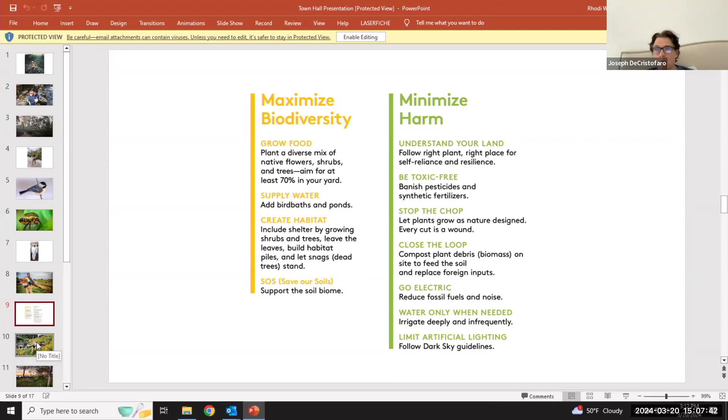100%. So we have a new book that we just produced that's a sort of update, more of a primer. And we are getting it translated. I think the translation just came in yesterday. So we're going to be printing that — about 1,000 copies in Spanish, and then another 2,000 in English as well. So they'll be available really soon.

That'd be wonderful. Especially, is there anything you could give us here at Village Hall, pamphlets or something that we can hand out? Absolutely. Yeah, I'll make sure that Tim can — I live in the Hudson Valley. Okay, so Tim will be your point person there for sure. Absolutely, thank you. That way we can get you connected with the homeowners. That sounds great, I appreciate that. Yeah, thank you. Thank you.

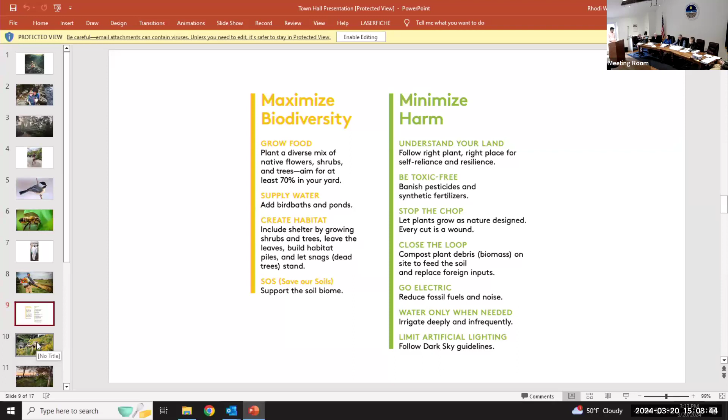Any more questions? I just wanted to compliment you guys. I totally appreciate it — Sag Village a couple years back actually did put in some restrictions on the blowers. I'm probably the only person on my block that isn't blowing their entire lawn every cutting. And you're right, it is amazing to me how much time is spent using the blower. I never use one, but I would agree with you, it has to hurt your body. Yeah, I think he should probably be wearing a mask too for all the particles.

I know, people need to mow it, get their lawn clear, they want to do it quickly. Totally understand, we're not saying get rid of them and throw them out or anything like that. But let's try to figure out how to bring everyone into the fold and make sure that people can do their work and do it well. Okay, thank you. Thank you so much. Thank you.

We have a site plan application of Samudra Farms LLC, 7 Fairfield Pond Lane.

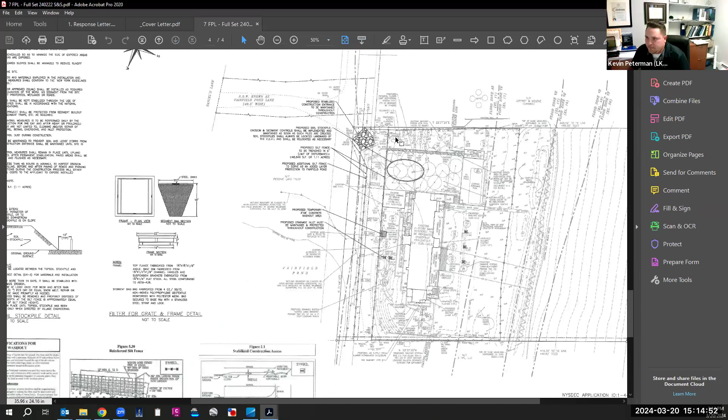Okay, so now we're seeing in this area up here the new location of the construction access, which I think is probably the most suitable location to make sure that all of the construction equipment is tracking over this thing. It's something that's traversable by a normal car, something anyone can drive over.

As part of this construction, we just want to make sure that the neighbor to the south, his access is not impinged, that it's not affected during construction. Those are some of the things we recommended in our most recent email when we said we looked at the plans, the applicant resubmitted, and he addressed all of our previous comments.

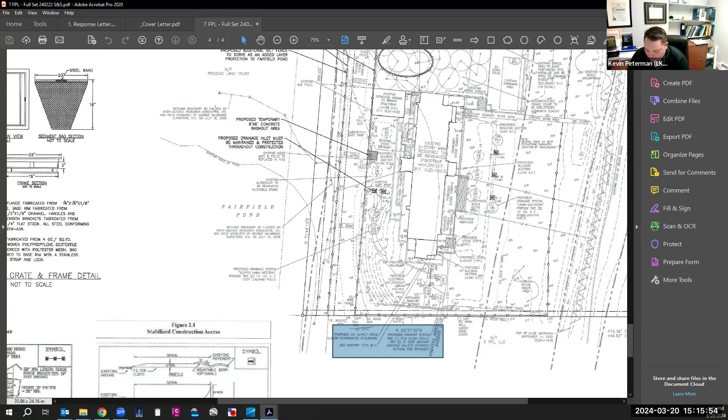Assuming the applicant has addressed all outstanding concerns of the board, we would recommend approval with two conditions. Number one, access to the private right-of-way must be kept clear at all times so as to not disrupt access to the adjacent residences. Number two, the applicant be responsible to repair any damages to the private right-of-way incurred as a result of the subject application.

We also have a coastal erosion hazard boundary that bisects this property, and the applicant is proposing to disturb lands seaward of that boundary. They're also proposing to add fill. We want to remind the board and advise the applicant that all land disturbance activities seaward of that coastal erosion hazard area boundary do require a coastal erosion hazard permit from the village.

Additionally, the applicant should be advised that an importation permit may be required from the village building inspector for the net import of 310 cubic yards, of which approximately 165 cubic yards of fill will be placed inside the coastal erosion hazard boundary. That's pretty much it. I think the applicant did a nice job addressing all of our comments to date.

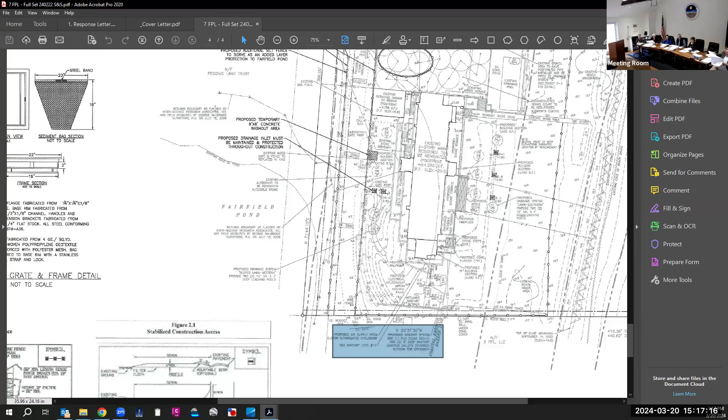Kevin, just for the purposes of the record and confirmation for the resolution, on the version you're referencing that's on the screen, the last revised date is February 22nd, 2024? That is correct. That's the version the board has, and it shows how efficient the village of Sagaponack is that February 22nd is a very recent revision. I confirmed with the applicant's attorney that this is the version the board feels like approving today, and this is the version that'll control.

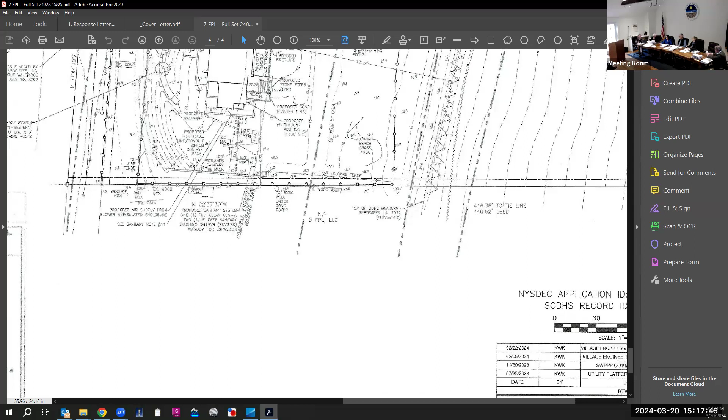Question, go ahead. The dark black lines are the proposed limit of clearing, grading, and ground disturbance. It seems like a lot of land there to clear and grade, and it's right behind the top of the dune. What are they clearing?

You're talking about the limits of disturbance on the south side of the house? Yes. Inside of this line, I think we're proposing to do some restoration work on the dune, which, as your engineer has said, will require a coastal erosion permit from the building inspector in that area. We had submitted with this application a copy of the landscape plan proposed to kind of restore that area.

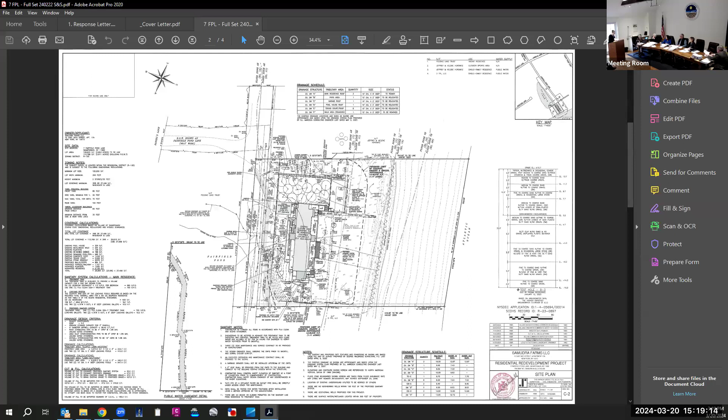And how are you restoring it? I think right now there's actually some lawn in that area that's being removed and replaced with native vegetation. We had submitted a plan prepared by Margaret. Are you digging out basically? No, the restoration will require the addition of fill, which Kevin can mention—that portion of the fill proposed in this property is actually for that area south of the coastal erosion hazard line.

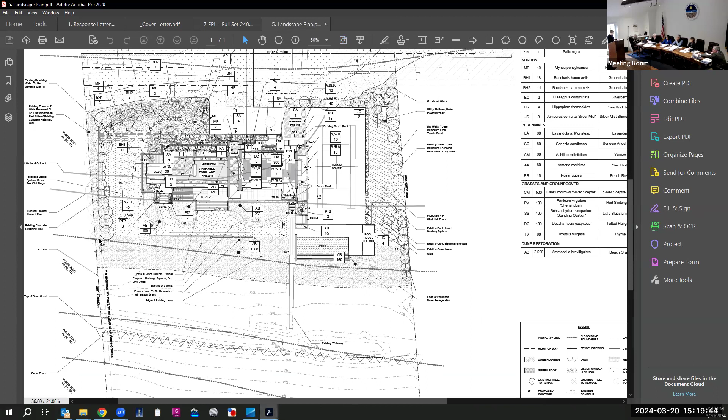But it says clearing and grading and ground disturbance. It'll require ground disturbance because we're removing existing lawn. It is shown on Margaret's plan, which gives you an idea of where the existing lawn is south of the pool area. It'll retreat in line with the edge of the pool, and then there'll be native vegetation to the south where the pool is right now.

So what you're saying is you're taking out a lawn and putting in native vegetation on the south side of the pool. Correct. But you need to recognize that you can't take out the lawn without a permit. Correct, which we would obtain a coastal erosion permit from the building department for that work. So it's more a matter of them trying to go backwards instead of forwards, taking out what somebody did.

Behind that dune is very sensitive. Are you redoing the dune as well? I believe there is some restoration work required in that area as well, because it is lawn at this point. Thank you, any other questions?

Oh, right here, yeah, there we go. I wonder if it's irrigated?

What were the rings underneath the tennis court for? Wasn't that part of that system? It wasn't—they're being relocated outside, it's still picking up drainage from the tennis court. Where are they being relocated to? To the east, right up there. They look a lot smaller. Those large circles are just a setback—the actual geothermal probe is just that little dot in the middle of those large circles. The smaller circles are the 8-foot diameter dry wells for the tennis court drainage that are already in place, they're just being relocated. The tennis court is being pitched away from the house towards a gravel trench with a perforated pipe that would then be collected by the dry wells.

What Kevin has highlighted, that little dot, is the actual geothermal probe. So it went from 12 to 8. There were no geothermal wells on the site before. No, I mean, you said you were moving something. The original drainage for the tennis court was located underneath the tennis court. That drainage system is now being relocated to the east of those 8-foot diameter circles—from 12 to 8. But that has nothing to do with the geothermal.

Maybe I can try to help clarify. These round circles you see with the dotted lines inside the tennis court show the offset, the required offset between each of the wells. Each of the wells is actually very tiny, right in the middle of these dotted circles. So what we're seeing inside the tennis court is, at the center of these offset circles, the actual well location, and then the offset circles themselves—these are kind of just fictitious, there's nothing actually there. It's just showing where the applicant can install the wells in accordance with the manufacturer recommended offset distances.

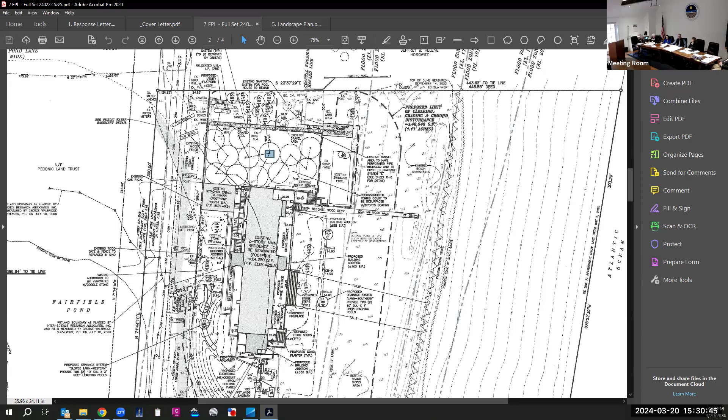12 wells going to 8 wells? There are no wells under existing conditions, to the best of my knowledge. The number of dry wells that existed in the existing tennis court will remain the same number, same size, and they'll just be relocated a bit further east. Thank you. Sure.

Guess I don't. Any other comments? Do you want to move the resolution, Bill? I'm not sure we've satisfied, I don't know if questions... we have it. This is not this circle, no, I understand that. That's where they're going to be drilled right there. Drill right in that spot.

So Lee, you kind of started some of this. Is there some problem you're trying to address? I'm just trying to figure out where we're going with this. I think it's a matter of information for the village to have. I wouldn't consider it an impediment given that an awful lot has been reviewed and found approvable. But I think we're going to see more of what would be considered the new and best. It's an issue of what's below us. We don't know an awful lot about what we're perforating, and that's a concern of mine.

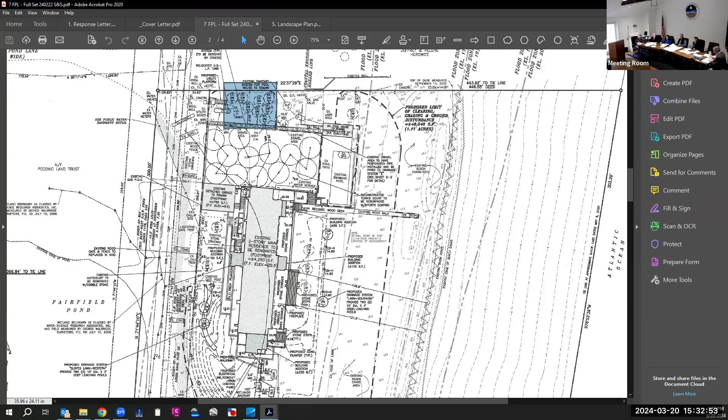Let's see, Kevin, I think you're done. He's not coming up again. You're done. Thank you, Kevin. Thank you very much. You're very welcome, everyone. See you soon. Okay, take care.

Next item is the Wolfer Trust subdivision performance bond. It's been, I guess, 2 years since the subdivision was finished. They put up the bond in cash. They don't really want to develop the subdivision, but they'd like to keep it all in place. So they're asking us to continue to leave the bond money with us, and they'd like us to extend the approval on the subdivision bond.

For additional 2 years, correct, Mayor? Any questions about that? I mean, I guess it's a good thing that they haven't, the land is still undeveloped. Okay, I'll make a motion to approve that, the extension of the performance bond. Second. All in favor? Aye.

Minutes from last meeting. Anybody find a problem? I thought they looked pretty good. I thought they were good. No problems? No, I wasn't here. Right, okay, no spelling errors. Oh, don't ask me for that. Okay, I'll make a motion to approve the previous minutes from the monthly board meetings. Second. All in favor? Aye.

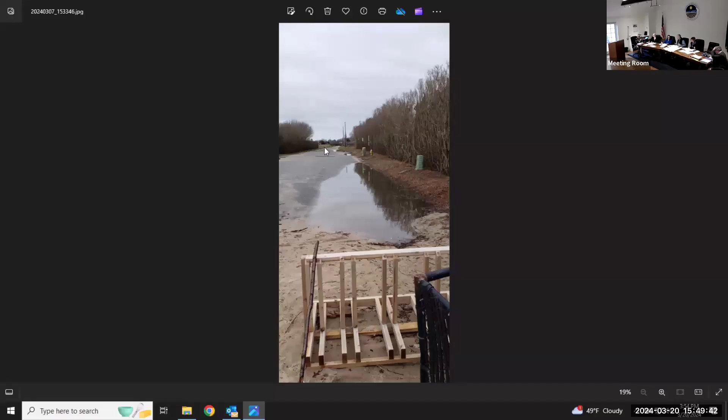They did a survey of buried utilities, so that would be the limit of how much we could push out. Is that where all the red marks were that I saw this morning? Oh, yeah, I didn't see that. Yeah, they must have marked it up in the last week or so. But the marks are there, so they must be looking for what's under there. Before he could definitively say what we could push out, he had to find out where everything was buried. So now that Jim has that information, I think he's going to present us with some ideas. Actually, he gave us numbers too.

The picture you have up right now, from the bottom on the right-hand side where the puddle is, going northerly to a little bit further, we're going to be putting a French drain on that whole section. It's going to be 2 foot wide, 3 foot deep, filled with gravel, larger gravel on the bottom, lined by filter fabric on each side of the trench. On top of the bigger gravel, we'll put the driveway pea gravel you see in most of the driveways, so it blends in.

A lot of times, especially on this project in the past, French drains were covered with filter fabric and topsoil and seeded, so that 6 inch layer of topsoil got silted up and is kind of preventing this water from going down. There were some small sections of an existing French drain in there. We're going to put the French drain down the whole line, this whole easterly edge of the parking area.

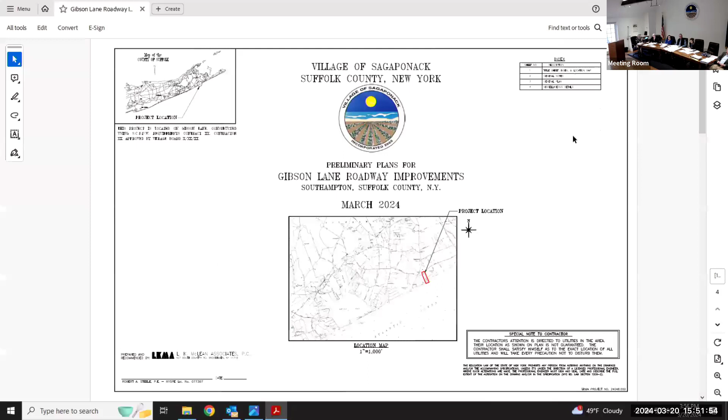Jim, I'm going to pull up the specs that you sent over. Can you park on that French drain? Yeah, it'd be gravel, your front tires will be on it. My question was the same thing — can you park on it? Yeah, yeah. You want to bring up the plans? They're not in our book, right? No. Okay. So basically, visually, it would look the same in relation to the parking area.

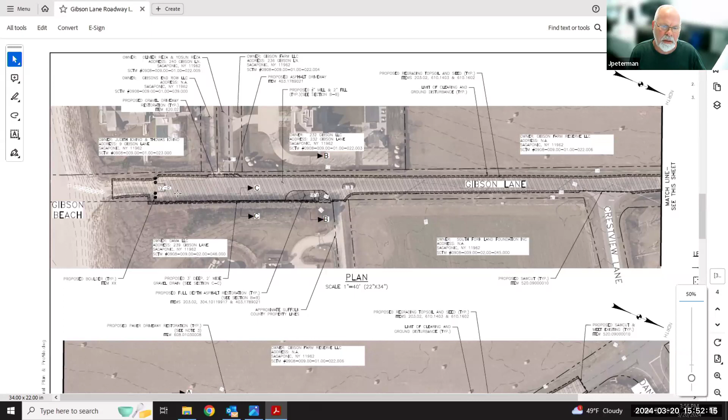Well, if you look at the plan, right where Rhodey has the mouse there now, there's an area left that we could probably gain another 6 or 7 stalls. Right where you've got your mouse. Oh, the bump. Yeah, there's a high area where the dirt and grass is probably 18 to 20 inches higher than the road, and I believe they left it that high because there's a lot of utilities running right there.

As somebody mentioned before, there's a lot of paint out there. The red paint is electric, the orange is telephone, the yellow is gas, and the blue, of course, is water.

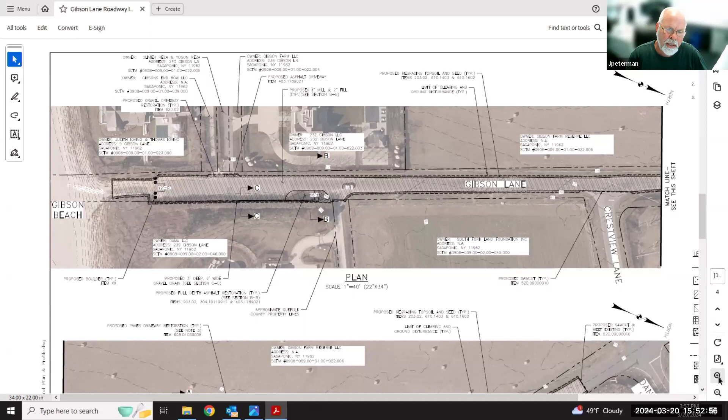Now that we know where everything is, I have two lines - an electric line and a telephone line that are probably 4 feet off the pavement in the area where we want to rip out that mound of soil, put in sub base, and asphalt it. We're going to do a test hole when it's time to find out exactly where these are. They may not be deep because they're not big service lines, just servicing a few houses. So if they're not deep enough, I can get the utility to drop them - excavate underneath and drop the conduits.

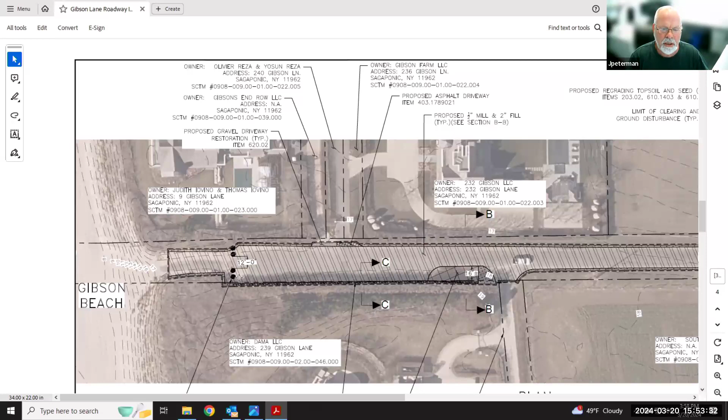Where's the French drain going? You can see it, it's on the south, well the bottom side of the road here, which would be the east side. That whole length, yeah, I think we had 50 feet before. It lasted 7 years. It could not be much more than 7, maybe 10 years. We've done the French drain previously there, and you can't actually see it.

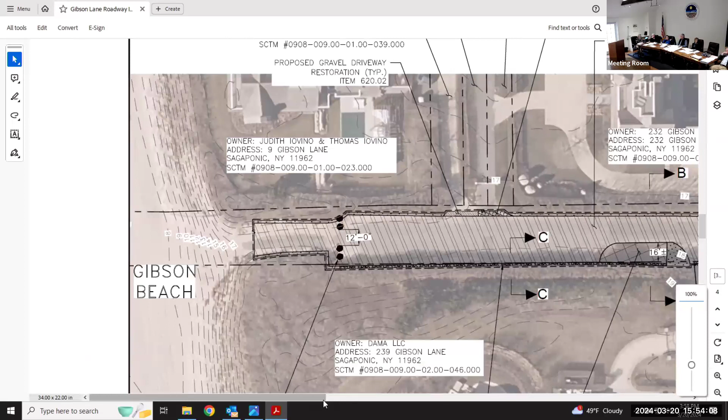Can't you just regrade it and forget the French drain? But you have water problems there because the property comes down on the east side and the west side.

Do they have something called hedges that are raised? What about a drainage wick, where you have a couple spots, dig holes and then... I mean, basically the French drain is an excavation 2 feet wide, 3 feet deep that you fill with gravel. You're not going to really notice anything except the gravel placed on top.

Right now, the surrounding properties and the road ending are higher than the road, so the water has nowhere to drain off to. All the surrounding properties, to verify what he said, have berms that the hedges are on. So they've created these hills that create the continual puddle that comes to the east side.

What about something called a drainage wick? You dig the hole - a wick is typically put through an area where you have a clay layer. That's typically called a wick, where you have a leaching basin and then you dig. Or if you have a recharge basin that's not draining, you put a very deep, like a 30-foot leaching basin at the bottom of the recharge basin - that's called a wick. It goes through the clay layer, or a layer that's not letting the water drain through.

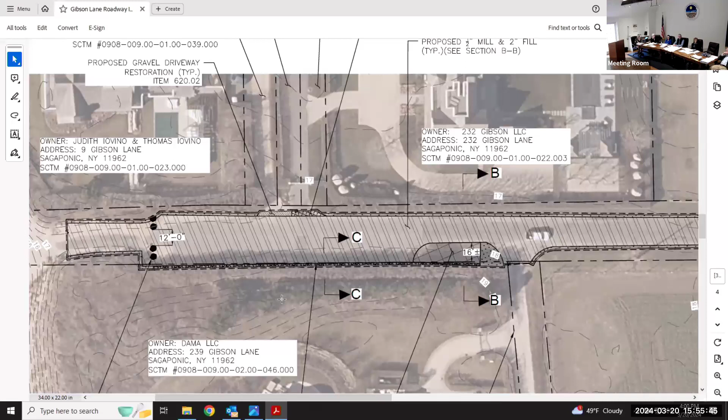It might not even be there - I don't think these properties actually bermed it. I don't know what happened on these properties years ago, but the contour lines show elevation. You can see I left these contour lines on the map here. The roadway is at 18 at this point, and the surrounding property to the east is at 19.

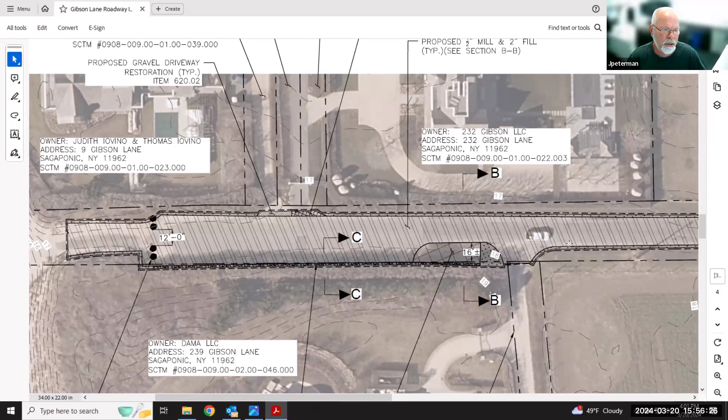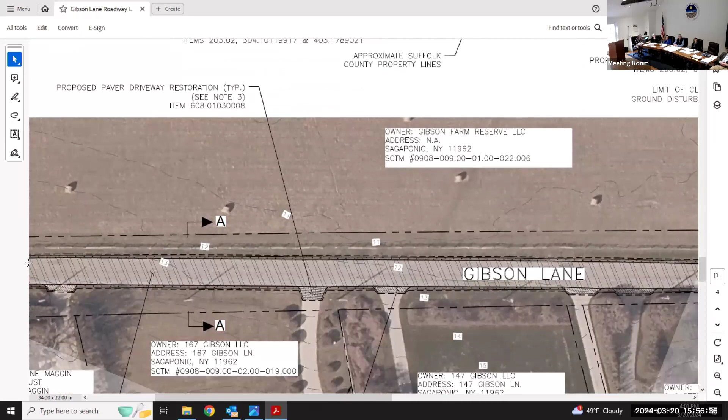So it's just a natural collection point. Basically, the high point of Gibson Lane is probably about where that white car is - there, it actually flows north. The general grade of Gibson Lane flows north up to Daniels, and it gets deposited into the drains we put there a couple years back - there's a big drainage easement where we installed a bunch of leaching basins in the Daniels Lane project.

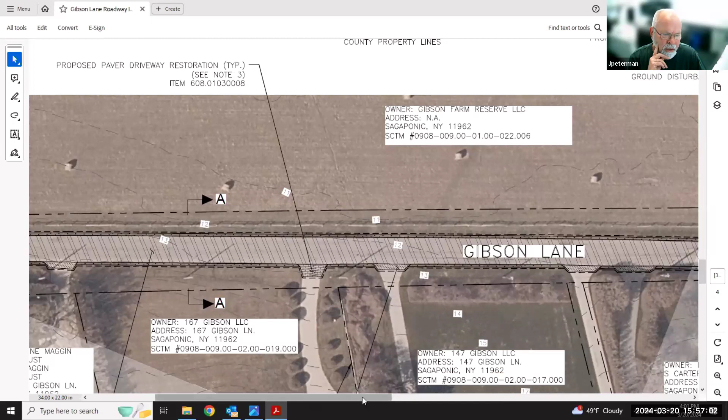You can see the lay of the contours on the screen right now. You have a 13, then a 12, and further north it continues - so the general slope, most of the stormwater that falls on Gibson Lane is flowing north to Daniels Lane. So the area down at the road ending is not a large watershed, it's just a little silted up right now.

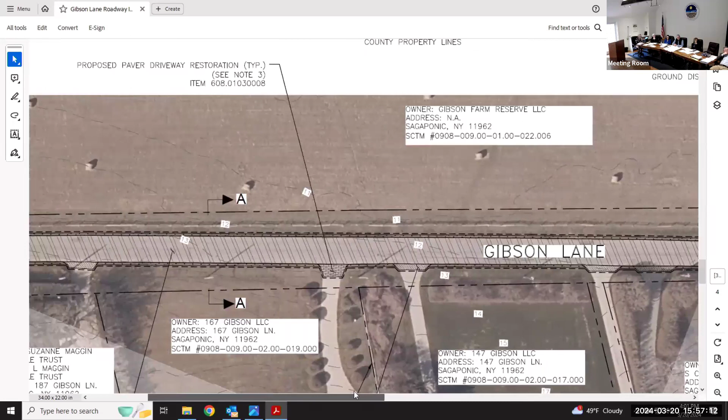The width of the parking area - are you getting any more to the east? When you dig that, is there anything buried in there that you can remove, some of that kind of berm on the edge of the parking field?

I'm planning on leaving the edge of the pavement where it is, and adding another 2 feet so the width of the trench will be 2 feet, plus the other 2 feet of gravel, so an additional 4 feet total.

That area was the 2 feet of gravel that was underneath the overgrowth from the hedges, right where the mouse is now. There was probably 50 feet or so of French drain put in about 7 years ago. I was on the board then, and it was needed. Now the overgrowth from the hedge has moved back, and if we put the fence in too, we'll probably solve a lot of problems at once.

So the old French drain doesn't work, it's plugged up and you can't revive it. The area it's in right now, I plan on removing the top foot of the silted up material, leaving what's in place, and then going north and south of that.

I just don't like the idea of gravel down at the beach. Well, if you look across the street, there's a driveway that's all gravel, and we plan on using this. If you look at, I'd say, 60-70% of the driveways in Sagaponack, they're using this rounded pea gravel, about a 3/8, quarter inch to 3/8 stone.

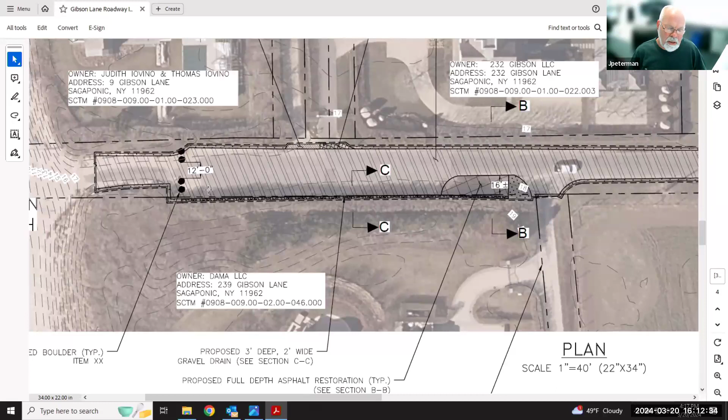Okay, the only problem is how far does it stick out? Is it going to be parked perpendicular to the fence? Yes, any parking stall that will be painted out there will be perpendicular to the roadway.

Maybe it should be, not parallel maybe? You're talking about an angle? Yeah, the problem with angled parking is it works well on a one-way street, where you could back out and go forward. But when you're backing out to leave, the angle you're at, if there's a car next to you on each side, it's going to make it very difficult for you to back up and actually head north again.

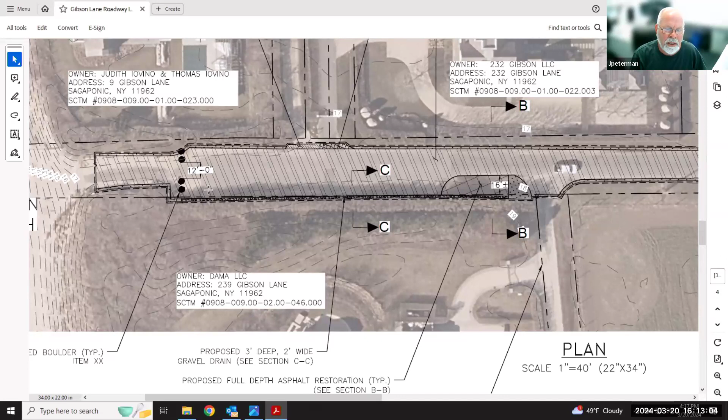No, I don't get that. So what is the decision on the handicap that you need to make? Just whether we're painting where it is, basically. He knows how many feet of paint it is to make one, so the price can be there, just if it moves a little bit, how much room we have between the end of the road before you get to the parking space.

So in recap, we can decide where that painting of the handicap is, whether it's perpendicular or at an angle, where the rocks are later, because we're just talking about a dollar a foot in paint. So it can be in the estimate now, and if we choose not to have a handicap spot, we just won't use that money, correct?

Correct. So what we're trying to decide now, I'm trying to sum it up, is whether we would be doing the front section in the south toward Gibson Beach with all the things, except we're not specifying where those rocks and the handicap will be, and we'll maybe decide differently later on those two items, all the way down to the corner of Gibson and Daniels. Where it- all the way to Daniels. Yeah, wherever the connection is, the connection might be slightly past the corner.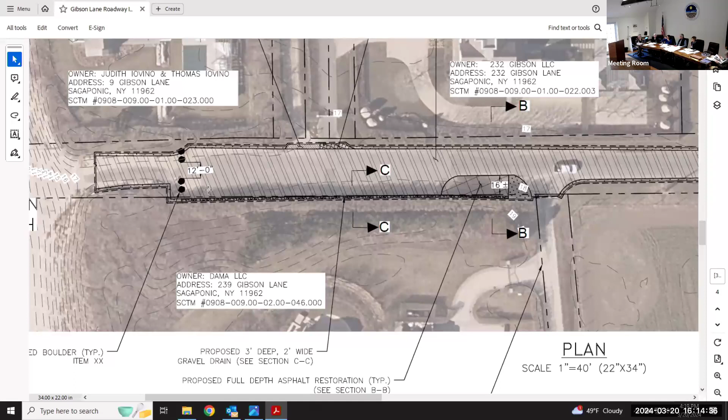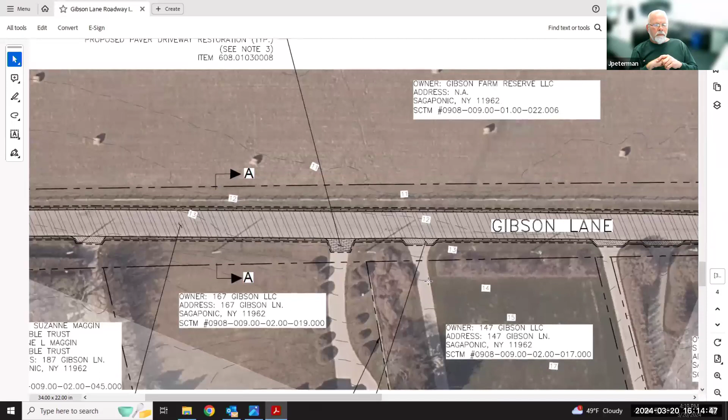Does it show? No. Yeah, it's before. There it is. So that's basically- okay, we ended up paving when we did Daniels. There was some drainage structure, you could barely see it on the west side of the road there. We had to do some work in that structure and pipe it in. It's right near where we ended the road, so that meet that I show here is where the other project left off, paving wise.

I'll make a motion to do the paving and drainage from the beach to the intersection with the prior paving job. I'll second it. All in favor?

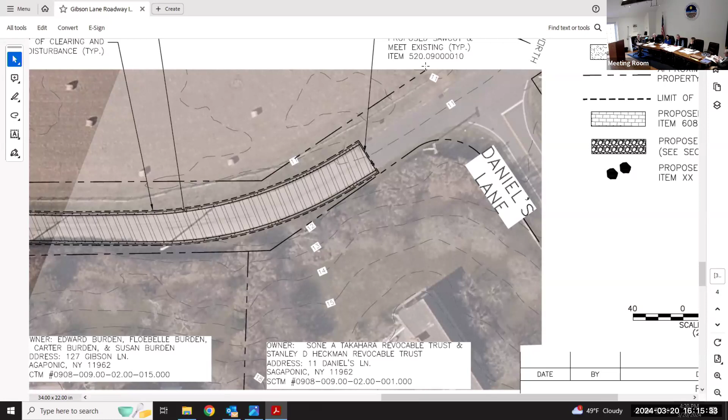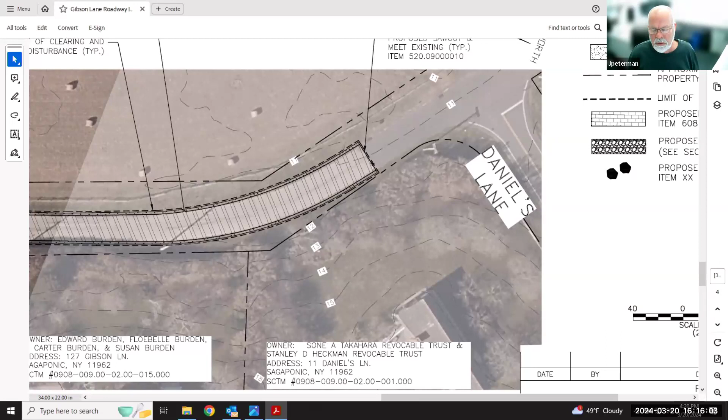Aye. Okay, I guess we'll be getting back to you, Jim, on those other couple items. Not an issue. I would just suggest we could get those POs cut to Rosemar so he could start setting it up. I know he was asking me about the PO for Seascape because he's got a drainage crew in the area working for the state on Montauk Highway. Right, so there were four drainage structures we got to do over on Seascape that he wanted to jump on. I don't know if he'll go in there next week or two weeks from now, but he was just asking me about it.

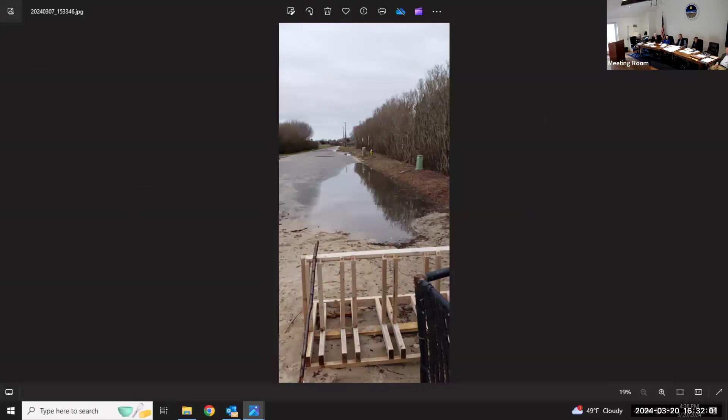It's more of a matter of interest, they don't mean a lot. He covered life cycles of ticks, how many ticks there are at certain times of year, and what type of ticks they are, for all 5 of them. There's larval stages, nymph stages, and then the adult ticks, and depending on which tick it is, they present some type of health hazard.

One of the most interesting things was he said that the main driver of the tick population, the most important one, is the deer population. There was a correlation between the number of deer in an area and the number of ticks. He said every animal has ticks on it, whether it's mice, birds, groundhogs, or rabbits, but the deer, if you track their population, had the most effect on tick populations.

He said that in areas like ours, where we have the deer reduction management program, they found there were fewer ticks. So for me, it really drove home the fact that us paying what we do to have this deer management program does have a real positive effect on the tick population.

He also ran through prevention, about spraying of properties. They did studies about different chemicals used.

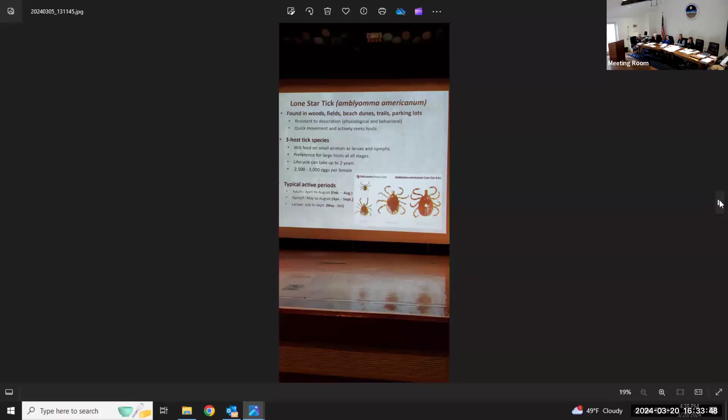Who was he again? I missed that part. He was... I have his name. But what group? He's from Suffolk County Vector Control. Oh yeah, and Rhodey was searching. I don't know if you found anything, or had time to find if they had some kind of pamphlet on this. All I have are your pictures. We'll see, I would think they'd have something, but you don't know really.

It would be helpful. He did get into different chemicals, but I saw his study and I'm not sure. He did some organics, he did some pure straight chemical stuff, and the straight chemicals worked the best, but I didn't like his study really. I don't think it was definitive compared to some other stuff I've seen.

He did get into repellents, things you put on your skin and also repellents you put on your clothing, like DEET, Picaridin, and there was a numbered one, which I have used, worked well.

He said they tried some organics, I think it was eucalyptus oil. He said the main problem was it worked, but it stained clothing and deteriorated. If you got it on plastic, like in your car, it would stain your car or deface the plastic, it melts the plastic. So the essential oils do that.

And the clothing treatment, permethrin, which seems to be what all the researchers use, worked very well, and they felt that it was safe.

Then he got into testing, looking for tick sampling, and it was basically what I had shown before. You can do it yourself instead of just spraying your property. It's possible to take a white towel, drag it around part of your property, see if you have any ticks, and maybe you don't need to spray.

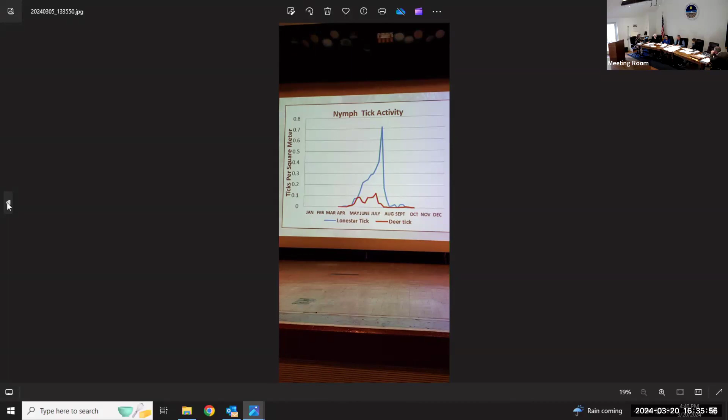The cleanup, the Great East End cleanup, is April 27th, a Saturday. Usually the beach meet time is around 8:30 in the morning. Pass this on to Sag School too. I'll send a mass email blast out about it.

While we're on Sagaponack Beach, can I bring something up? The parking lines need to be revamped and repainted. There are two spots in the parking lot that drain down into the pond that need to be fixed. Maybe Peterman or Rhoda's been in touch with them, but it's not our lot, though we've been agitating for it. I talked to him about that area, right as you first come in, turn to the right by the pond. There are two spots there - one holds water, the other one goes into something. They're supposed to be looking into some sort of drainage system to capture that water before it goes into the pond.

Would they say anything about painting the lines? They usually do it, but they didn't do it last year. It's bad - people agitate and Rhodey gets in touch with them and tells them, but you should pull up on your own and tell them you have a problem parking there because they don't paint the lines. Maybe they'll get enough grief and do something. There's also an issue where the little building is - you're not supposed to park to the west of it, but the lines are gone to the point where you don't know that, and people end up parking there. It's like a turnaround spot, and now you're not able to because a car's parked there.